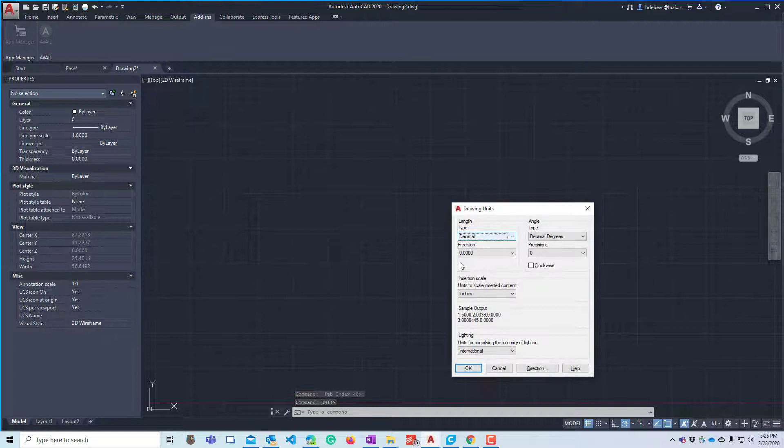Now we're going to set our units. Keep it at decimal, but I want it to be millimeters. I find it a lot easier to measure in millimeters these days with the calipers, and it's also what my printer prints in, so I'm used to it now.

Alright, if we take a look at the drawing, we can see it's just an M, really. It's a millimeter thick, everything's a millimeter thick. It's 8.5 millimeters high and 23.9 millimeters wide. And the post in the middle is in the middle, at the center point.

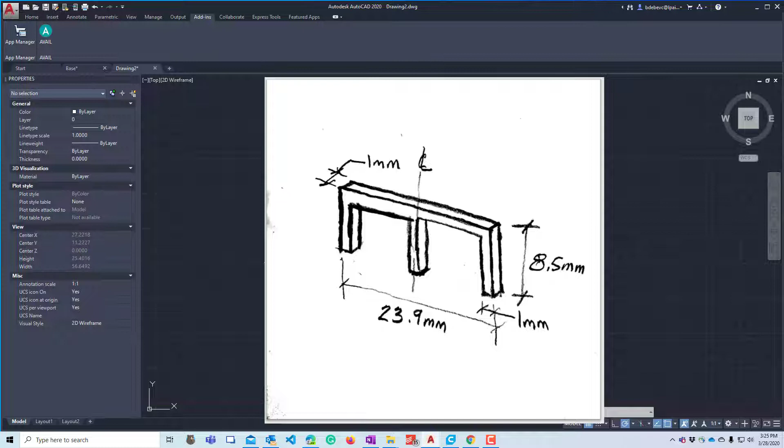So I am going to go to a 3D view here so you can see what's going on. We'll grab this and move it like that. Fantastic. Alright, we'll draw a line.

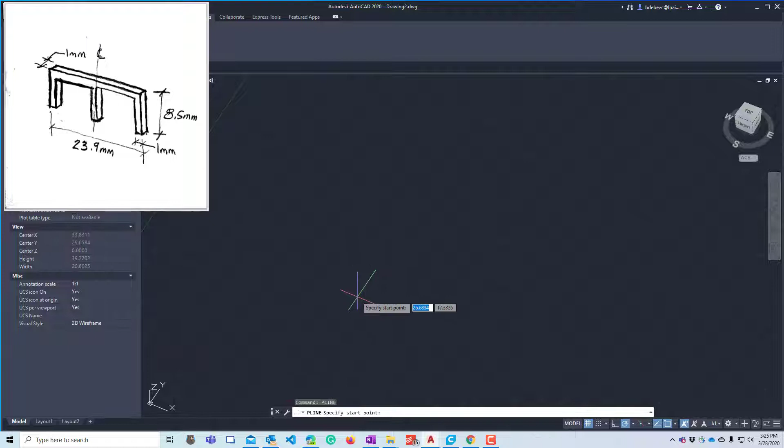I'm just going to do a P line, because I know what it looks like and I know all the measurements, so I'll just go like this. I'm going to go up 8.5, and then I'll go this way, 23.9.

I'll go down. I'll zoom in now that I've got some lay of the land here. 8.5. We'll go over this way 1. We'll come up this way 7.5.

And we'll go this way. It's 2 millimeters less, so it's going to be 21.9. And then it's going to be to there, over that way, and close.

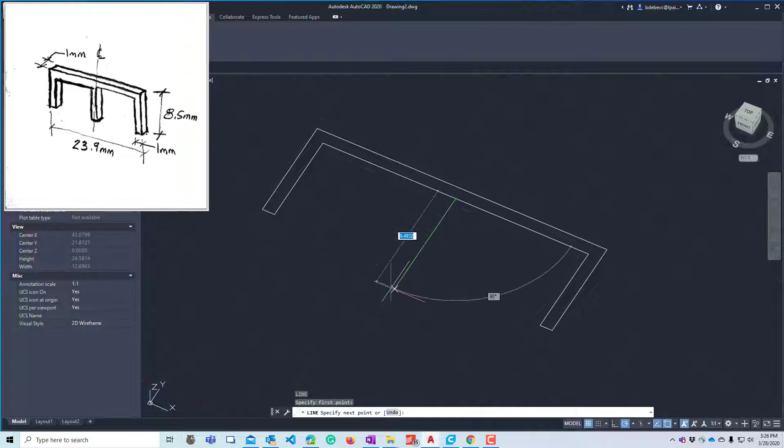And then we'll go ahead and draw another line from the mid of here. We'll grab that point to there. There's 90 degrees to that way. We'll offset it 0.5.

We'll erase that midline there. We'll draw a new line right here to here. And then we'll trim away that part right there. There we go, there's our M.

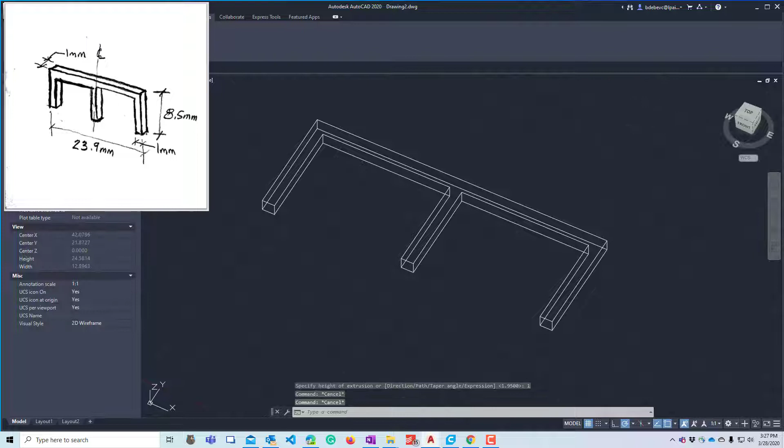Now we're going to use the join command to join it all together as one polyline. And then we'll extrude it up 1 millimeter. And then we'll make it look cool by going into X-ray. And there it is, there is the windshield ready to be printed.

Now, if you watch my other videos on printing, you know that I'm a fan of PETG, and that's what we're going to use to print this with, because it doesn't melt in the garage, and it doesn't melt when you mail it to somebody. So that's what we're going to use.

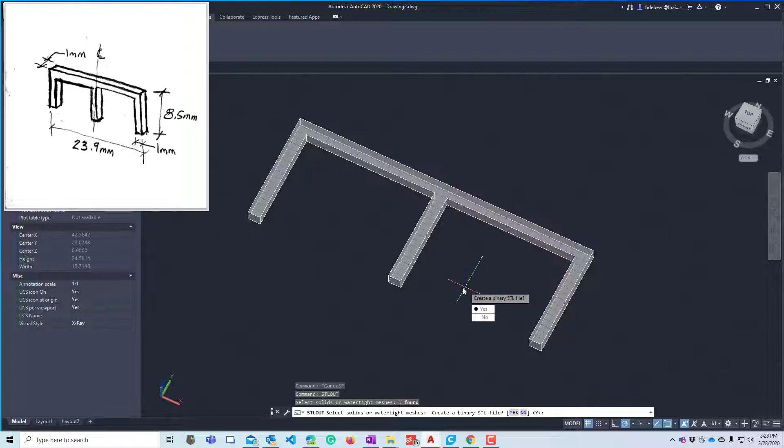Do an STL out, that'll run the STL out command to create an STL file. I'll pick on the object I want, hit the space bar for enter, hit the space bar again for enter. And I want to put it on the desktop, and we'll call this Land Rover windshield. Save.

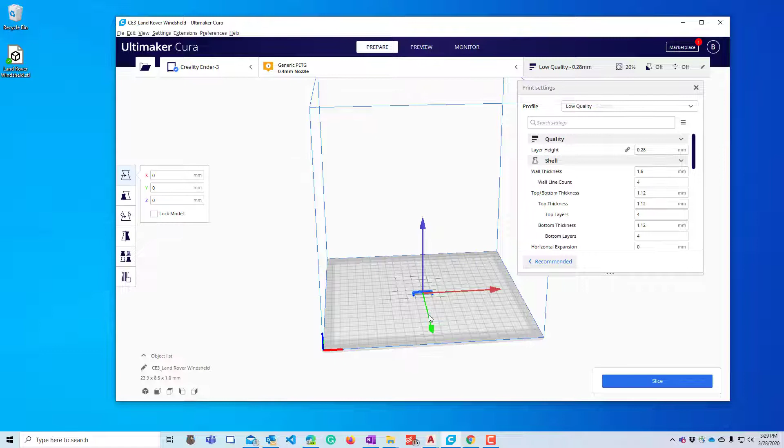Minimize everything, and there it is. We'll start Cura. Oh, I happen to have Cura up already. Got it up and running. We're going to drag our windshield onto Cura, grab it here and move it to the spot where I like to print it.

And there we go. Let's look at the settings. The settings should be all set as PETG, so that's good. Layer height, it doesn't really matter - in fact the higher the layer height, the thicker it is, the better, in my opinion. So let's live on the edge and go with 0.32 millimeters for the thickness.

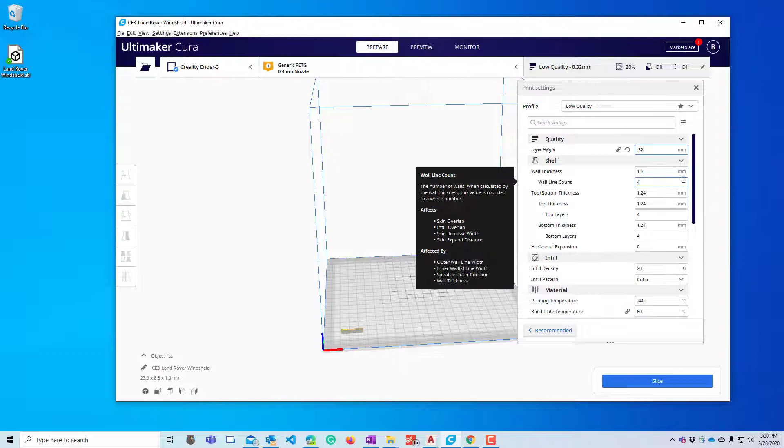Now, why am I going so thick on the thickness of the plastic? I'm doing that so that I don't get as many layer lines in the print, and there's really no detail in the z-axis going upwards this way, so I can make it as thick as I want. Everything else is fine there.

240 degrees, that's fine for this stuff. 235, we'll change it to 235, what I normally print with. 50 is a little fast for this, so we're going to change it to 40. Wall speed, we're going to make it 35. On a speed of 20 is just fine. We want to retract, we do not want to do cooling.

And everything else is fantastic, so we shall slice. And then we will preview. We want to do a preview.

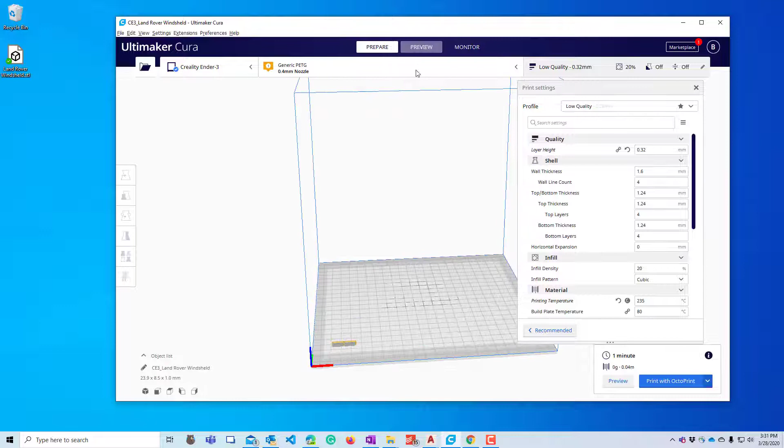I want to zoom in, pan it around, zoom in some more. That looks good, so it's 3 things thick. Good, I don't have very many layers. It looks okay, the second layer should be just fine. So we'll go down to the second layer - yeah, everything's good. Okay, so we will say print with Octoprint.

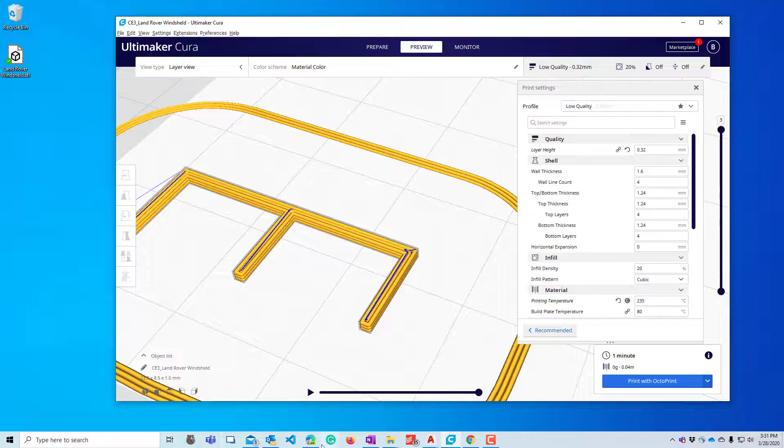We'll queue the job and then we'll close that and then we'll launch our browser. So here is Octoprint, I am connected, so that is good. We shall find our Land Rover windshield. There it is, we'll click on it.

G-code viewer, that's the one I want. I will hit the print button. No, it's not printing - let's go ahead and go to connection and disconnect and reconnect. There we go. And then we shall say print.

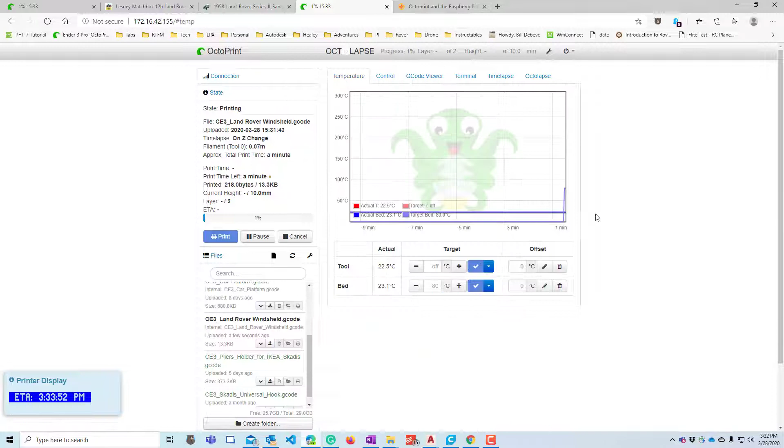So now it's getting the temperature set and it will print. So there you go, that's how you design a Land Rover windshield inside of AutoCAD. It wasn't very difficult because it wasn't a very complex model. We went ahead and took it into Cura and sliced it, and then we printed it out, and there it is in all of its glory.

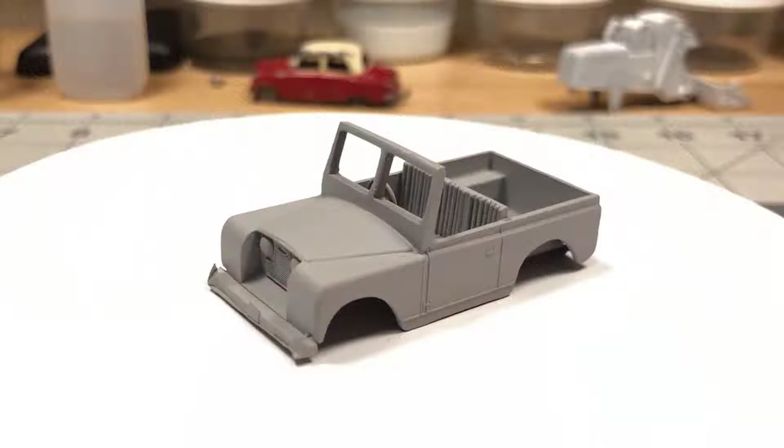Here's what it looks like on the model. This is after I glued it on and did some sanding on it to make it look good, and filing, just to get it into shape where I wanted it to be.

I hope you enjoyed this video. If you have any questions, leave it in the comments, I'll be happy to answer the best way I can. I may answer in a video if it requires that, and that's okay, I don't mind doing that. Let me know.